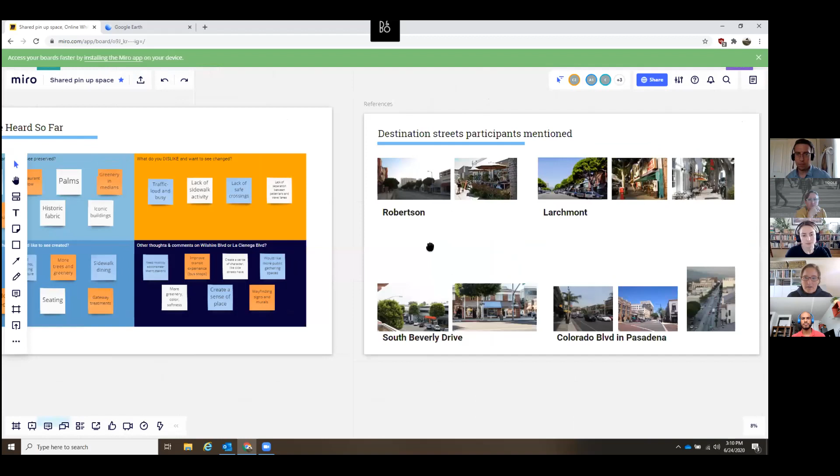So it has its own sense of identity within the community, and it's a place that people are encouraged to go. A lot of people mentioned different streets. We asked a question around destination streets: where do you go, what do you like? And lots of people teased out a number of different locations.

We couldn't pull it all together right now, but some streets that seem to resonate with folks are those of a certain scale and experience. There are strategies we have for how we can infuse a little bit of that into Wilshire and La Cienega.

Elements of a great street. So just wanted to mention some things that we're considering based on some of the conversations. The importance of nodes and destinations along the corridor, breaking it down into areas where people can congregate, or there's a greater presence of retail and commercial areas. That's a real critical component of this.

We'll talk about how that breaks down in character zones in the next slide. Some of the elements you've talked about are how we can get these destinations and nodes to contribute to the experience and provide opportunities for rest or congregation. Street character—can we infuse a sense of identity through the materials we choose, as well as the plantings and different elements?

Buildings and sidewalks, making these human scale, so they feel very comfortable to people walking along the corridor. There are lots of strategies we can employ around creating new active and open facades as redevelopment happens, and ways to encourage cafe spill-out space or retail spill-out space in a new configuration.

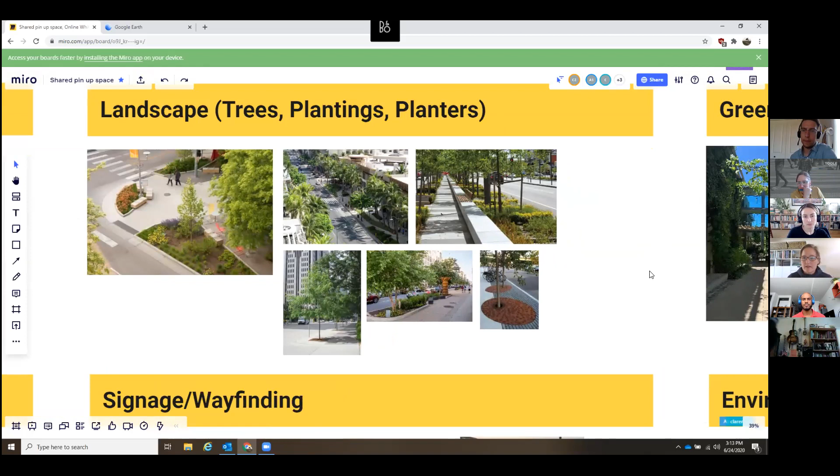Crossings—again, we talked a lot to folks about the importance of pedestrian comfort and safety. How do we provide great opportunities to do that at key intersections? That can be handled through things like a pedestrian scramble. In some instances, there might be opportunities along the corridors to provide mid-block pedestrian crossings and refuges, but how we treat those will be really important so people are safe, feel safer, and are safer.

Signage and wayfinding can be a great identity feature as well, part of a cohesive strategy to really tell the identity of Beverly Hills.

Some other elements we talked about with folks are transit and the importance of creating shelters that feel welcoming and feel perhaps part of the identity as well of Beverly Hills, contributing elements within the corridor.

Lighting can also be a feature here. There are a lot of different types of lighting along the corridor, and what are some of the ways we can pull that all together and have an overarching strategy for lighting that feels pedestrian scale and contributes to safety along the corridor as well.

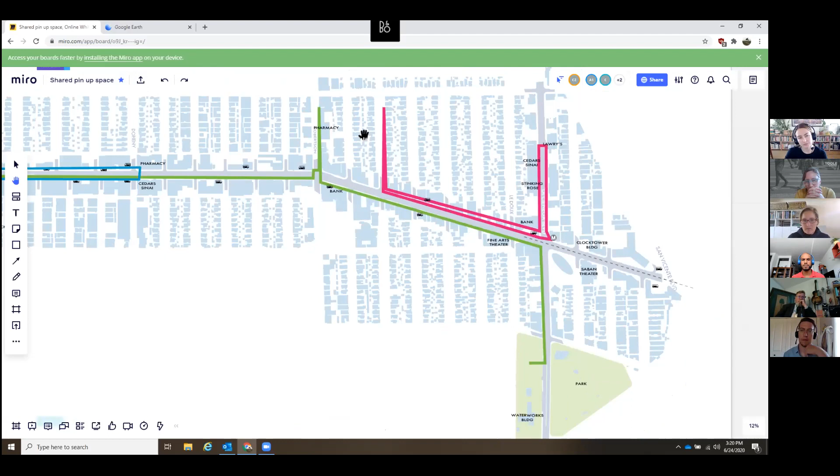Maybe it's at Cedars-Sinai, and they're having some lunch or dinner at another restaurant or destination, and then they return back to their home as well.

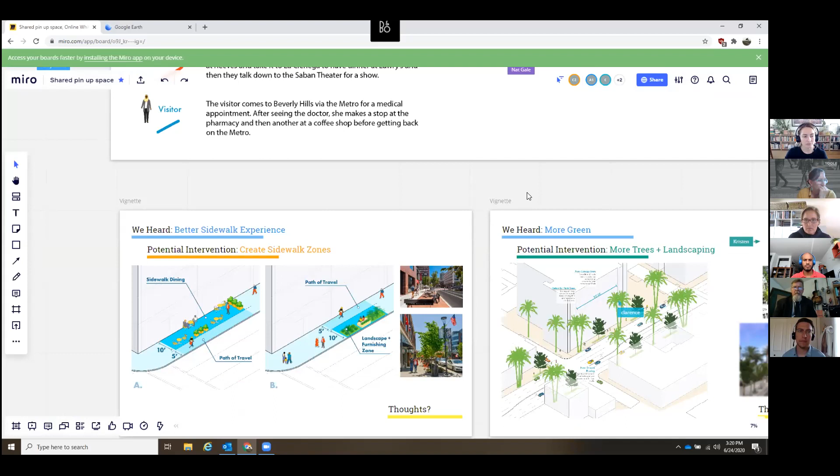And then we wanted to dive into some starter ideas around how we can improve the sidewalk experience. These are a series of vignettes that I'll have Clarence and Abby speak to, creating a more enjoyable sidewalk with the space that we have existing, and maybe some ways to augment that for the future. So Clarence and Abby, go ahead and take it away.

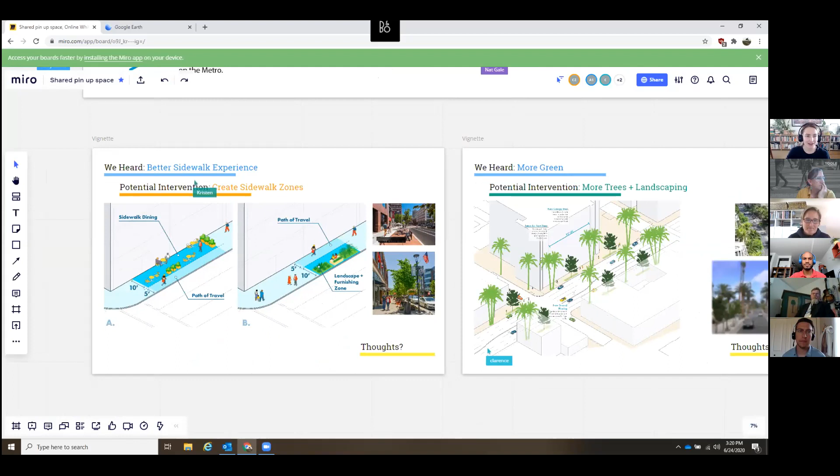Great, I'll jump in since we're going in order here. I'm Abby, I'm with Rios, who's also on the design team. So just to build off some of what Cindy, Nat, and Kristen have already said, we've heard a lot of great feedback about trying to find ways to make the sidewalk a more enjoyable experience along Wilshire and La Cienega, really focusing on the pedestrian experience and thinking about how we could make that more enjoyable, more comfortable, safer, more beautiful, just better in general.

Later we'll touch on ways we might expand the sidewalk zone in certain moments, but here we wanted to think about strategies to work with the existing sidewalk. The majority of the sidewalks in the project area are 15 feet wide, so that's not enormous, but it's certainly enough space to carve out some different zones.

Here you see two different diagrams of strategies we could use to carve out different areas within the sidewalk to help make it feel like more of a place, enliven it, make it safer, and more enjoyable overall. On the left, we thought about dividing the sidewalk into two general zones: a 10-foot area close to the building, and a 5-foot zone closer to the street.

In certain areas along the corridors, it might make sense to have sidewalk dining or let the retail spill out onto the sidewalk, which is what you're seeing on the left here. This can be great not only for folks coming to eat at the restaurant who want to sit at the patio, especially during post-COVID or current COVID times, but also makes the sidewalk more enjoyable and feel like more of a place, even if you're just walking by.

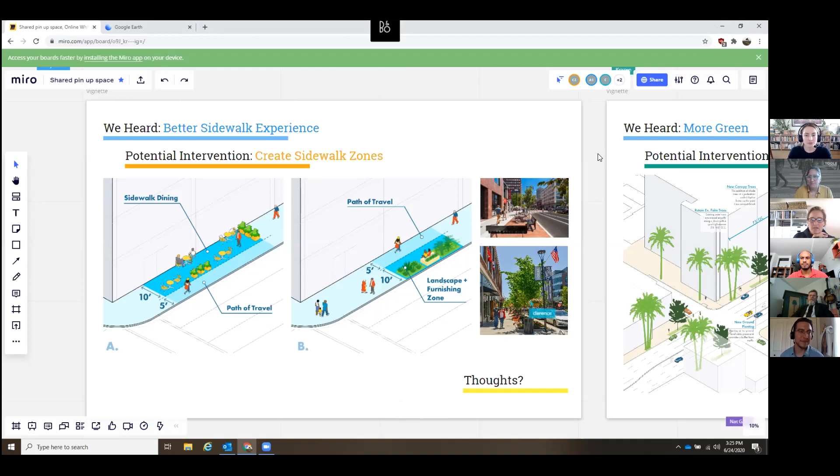Thanks, Nat. I think we'll have another discussion around this and these ideas as we look at some cross sections that we've started to frame conversation again with you. I'll pass it off to Clarence now to talk a little bit more about some green landscaping opportunities and then also some street furnishing opportunities.

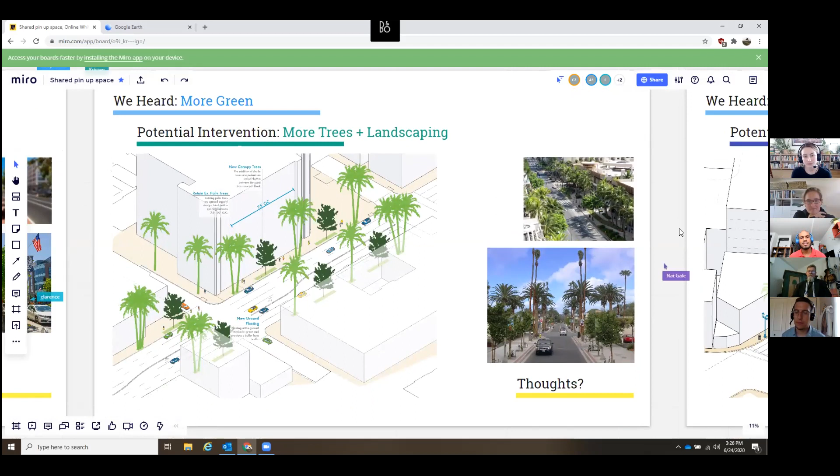I'm Clarence, also with Rios, part of the design team. One of the comments we heard is the want and desire for more green on the street, whether through ground planting or the addition of canopy trees. Right now the existing palm trees are at a rhythm of between 70 and 100 feet on a lot of these blocks. We understand these palm trees are very iconic, but they do not provide a pedestrian scale, both in rhythm or height. They also do not provide a lot of pedestrian shade.

So one thought is a strategy where we begin to punctuate in between those palm trees with a canopy tree, something a little bit more scaled to the pedestrian, and providing some ground planting within those canopy tree zones that could provide not just a green kind of wash across the street, but also has the function of becoming a barrier and a buffer so that people will feel safer, whether through some sort of pedestrian amenity zone, through dining, or as you are walking down the street.

And then if we wanted to go to furnishing next, we wanted to have a conversation about what are the different amenities that happen on this pedestrian scaled streetscape, and how we can begin to concentrate furnishing at certain nodes, certain areas where we feel there will be more pedestrian activity, but also have a consistency of both furnishings and rhythm of street lighting along the entire corridor. We wanted to open up the discussion about not just what the furnishings are, but also what these bus shelters begin to be, and how all of these furnishings add to the identity of the corridor.

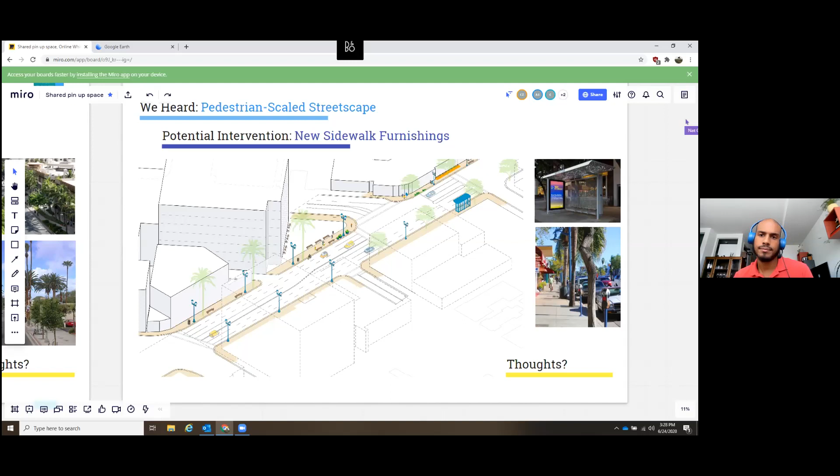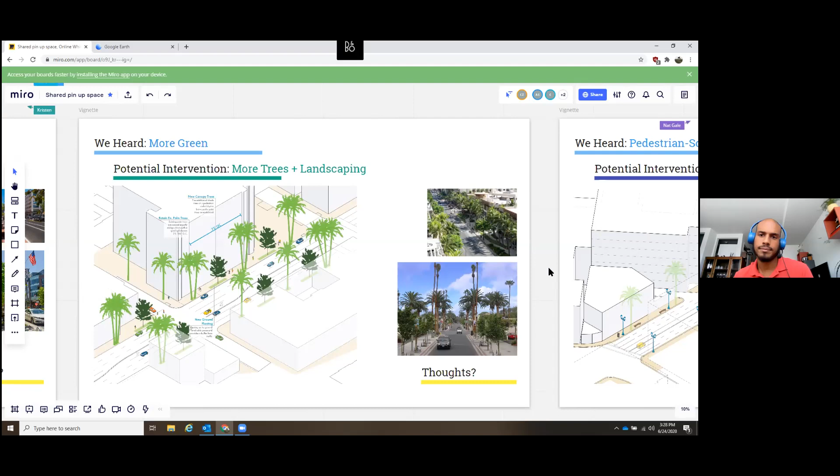Thanks, Clarence. I'll also mention that some of these strategies are what we'd call long-term ideas. We talked with Ken, our urban forester, about as we think about augmenting the corridor, what does that mean in terms of maintenance and things like that? So it's something we need to consider, and there are some lighter touch interventions we can have, say in this green landscaping approach that maybe are above ground, or when the street can be reconstructed, really being intentional about incorporating irrigation and opportunities to take care and maintain the plants if that's something that moves forward.

So I think I saw another chat come through. Should we pause for that?

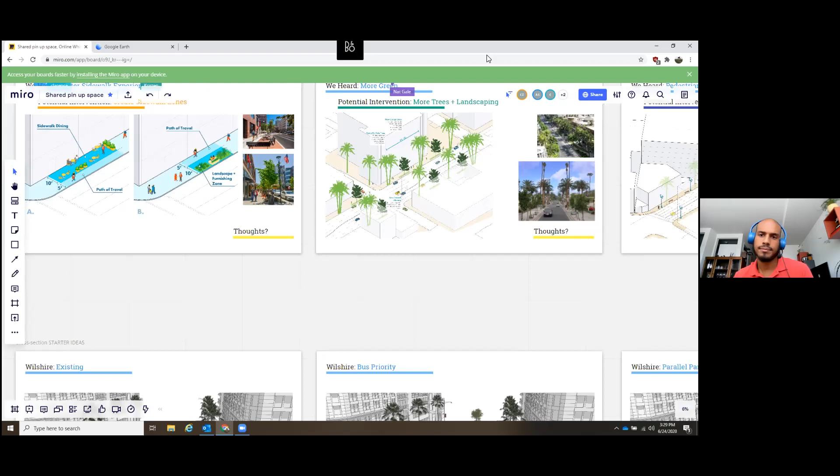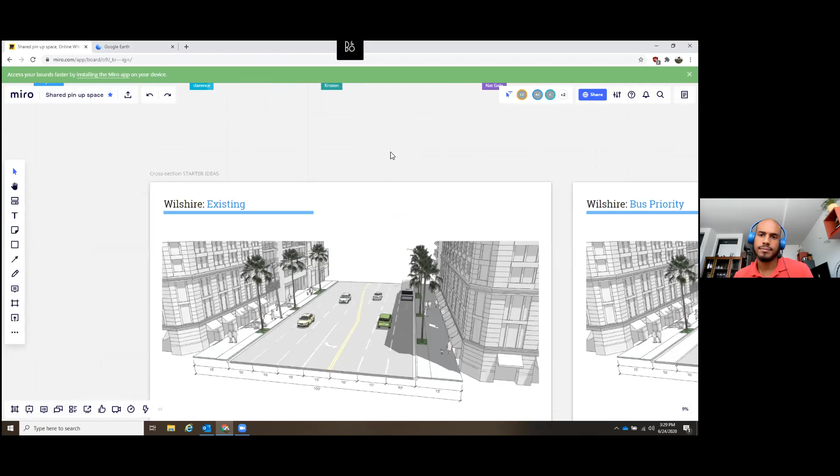It's from Mandana: the 5-foot pedestrian path next to the street may have issues with tree placements and will not feel so safe. I think that's definitely true, if there's 6 lanes of vehicle traffic, 7 lanes including the center turn lane, on Wilshire specifically. So I think it's a great note that balancing all of these strategies with the context of the corridor is going to be super critical, and engaging in some difficult conversations around trade-offs of roadway space. I think that's what Cindy is going to preview next with some of these cross sections, so keep those comments coming.

I think this is exactly what we want to hear from folks. We're also eager to engage in a dialogue and a discussion. So if you want to verbalize something, please, if for whatever reason you're not able to unmute yourself, let us know, and we should be able to take care of that for you, so that we can talk and have a dialogue. I think that's part of the richness of this conversation, is we want to really hear from folks in the room.

Great, thanks, Nat. I think this will be the point where we'll get a real rich conversation, because this is teeing up some different ideas on what we know about the corridor, what are some strategies or ways we can repurpose some of the lanes, and if that's tenable. So it's going to be a good conversation here.

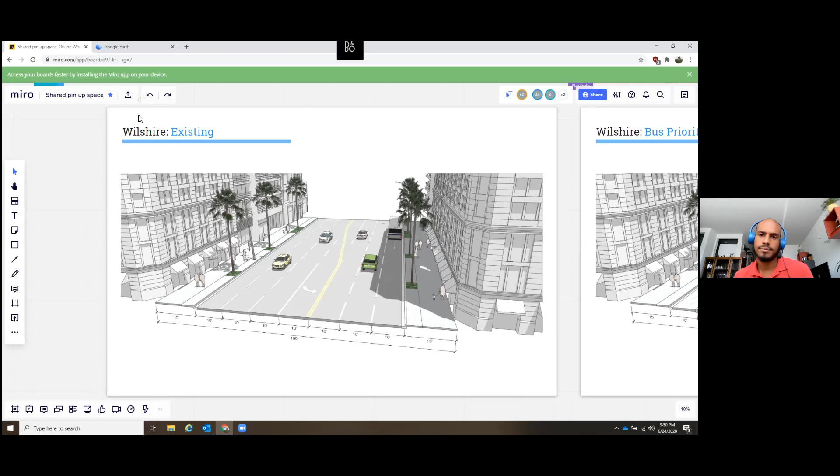It's always great to tee it up with what's existing right now, so you all know how it operates for the most part. Three lanes in each direction with protected left turn lanes at a number of intersections, and 15-foot sidewalks pretty much throughout the corridor, with a few exceptions. When I say corridor, I mean both La Cienega and Wilshire, but we're focusing mostly on Wilshire right now. Yeah, this is the cross section for Wilshire specifically.

One idea, we heard a lot about the transit that runs through, not only serving the community, but running through it as well, and the option of continuing some of those bus priority lanes through here. That would be repurposing the outer lane to bus-only travel. If you have bus priority on that edge, it allows for better headways or better timing of that system. The delay for transit is improved when they're not operating or kind of leapfrogging through personal vehicles as well.

This is also a nice strategy. It does help the edge of the streets feel a little bit more comfortable. Buses often obey the posted speed limits for the most part, and it's more comfortable in terms of the speed along adjacent to a sidewalk. Also there's the importance of how we treat that edge. As Abby was talking about, in some areas the walkway is along the building edge, and how we treat that five feet right adjacent to the busway is really critical as well, thinking through strategies around landscaping and furnishings to make it feel safe and comfortable.

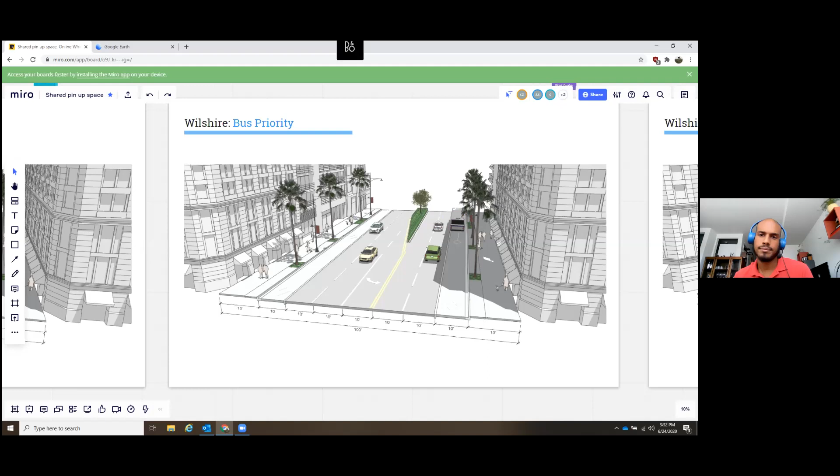I'll just note on this one, again for some of the comments that were already made about not enjoying alfresco dining next to six lanes of car traffic or the five-foot pedestrian path, this is one strategy to think about how that curb lane can be just a different type of buffer.

I'll also note that we've heard, through our stakeholder interviews, that there's a history of an attempt to put a bus lane down Wilshire previously in Beverly Hills, and that's come up in these meetings before, so we're not glossing over that. This is just part of our responsibility as designers to consider all sorts of options and all different ways of thinking about how to future-proof the street, how to think about what the street will look like, not just in the current condition, but 2, 5, 10 years down the line. We wanted to make sure folks know we're aware of the history and also thinking about the future. The last thing I'll say is, in the design team, we haven't talked about this, but there are more targeted bus improvements you can make as opposed to just a bus lane—queue jump lanes, things that allow you to speed up bus activity just in targeted improvements around intersections. So that's something to think about in our design approach as well.

Thanks, Nat. I think one thing I want to call out here, a pretty critical element we didn't focus on too much for this initial pinup, is this idea of a median. This is something that would be a great strategy, especially along Wilshire, as we think about—if we can't really affect the sidewalk space on the outside edges—what are some other ways we can make the street have its own sense of identity and iconic feeling?

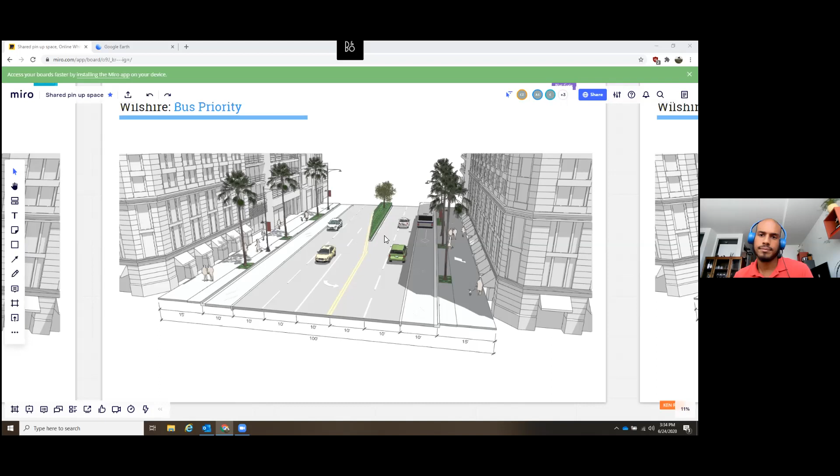In some areas we have dedicated left turn lanes, but they're sometimes very long turning pockets, and we could shorten those—meaning the length of this lane right here is very long. But there are opportunities where we can shorten that up, still provide for the dedicated left turn lane, but create a median experience. I have some images we can look at if you're interested, from some comparable cities that have done a really good job with medians. You already have some, of course, in some areas along Wilshire, certainly in the Golden Triangle area, but we could supplement that with some others as well.

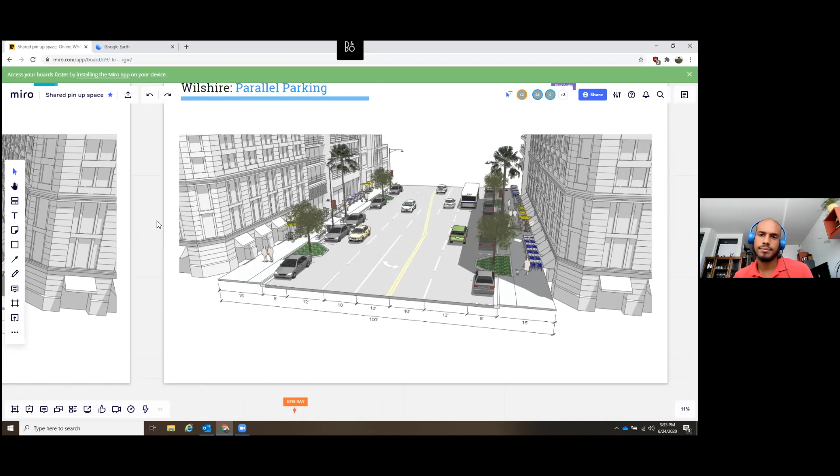Another option for that outside turn lane, and to incorporate a little bit more pedestrian-friendly environment, is to repurpose that outside lane as parking, dedicated parking with bump outs. This would allow for landscaping throughout the corridor and that buffer, that real feeling of separation between the fast or heavy motor vehicle traffic and the two interior travel lanes, and of course the dedicated left turn lane. So just another option we're exploring.

I might pause here and see if there's any comments on these two options and how people feel. I'd love to hear from folks. Feel free to unmute yourself again, or chat us if that's easiest.

Hey guys, this is Corey Clem. I just wanted to agree with Ann. I don't think we could do a greater disservice to this corridor than to not provide contiguous infrastructure from what borders us to the east and west. I know there's a history there, but hopefully we can pitch to the community and help them understand that even though there's a rail line going underneath us, the buses serve a lot of other people. And as we start to get some increased density, that's going to be very important for people to come in for work across all jobs. I think the pushback I've heard is that people think the subway is going to solve that problem. I just want to make sure that as you guys pitch this to the public, you help make that distinction.

Great point. That local service is really critical. Metro serves a certain role, as does transit within this area.

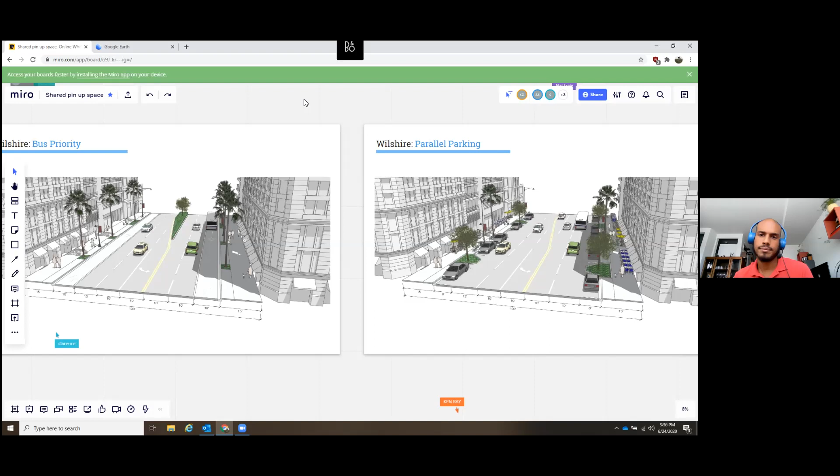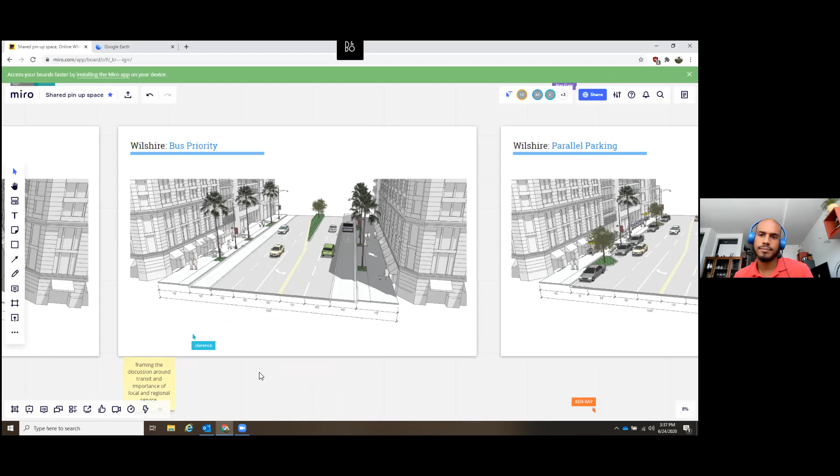Yeah, I was just going to say we could even think about reframing the name bus priority, right? Because we've seen other cities take these sort of flexible lanes and turn them into different mode lanes - taxi lanes, TNC lanes, other private shuttles. We've heard from some of the other institutions in the area their interest in providing more mass transit. So it's just about thinking about the flexibility of the street and the dynamics of the street, and how we can create a street that's a little bit more catering to all those different needs.

So thanks Anne, who typed it into chat, and Corey for speaking up. It's helpful to hear that.

I don't know if it's a third rail, but I had mentioned in my chat with you guys, if you look at the data from bike share to our accident data to just Strava, this is going to get used by cyclists who are taking other forms, including the subways. I don't know if you've got a transit priority slide where that becomes a hybrid, and maybe you left that off intentionally, but I just think that outside lane as transit is a really good way to pitch it.

Yeah, that's a great comment. We do have some imagery around, yeah, here we go, that repurposing or that dual purpose option.

Yeah, I saw that, that's great. And obviously that flanks us to the east and west. So people that are commuting, who are not on the charrette right now, when they get to the city borders aren't going to understand that that's gone.

Mm-hmm, yeah, good point. Any other comments? I'd love to hear from others on these two different options and ideas along Wilshire.

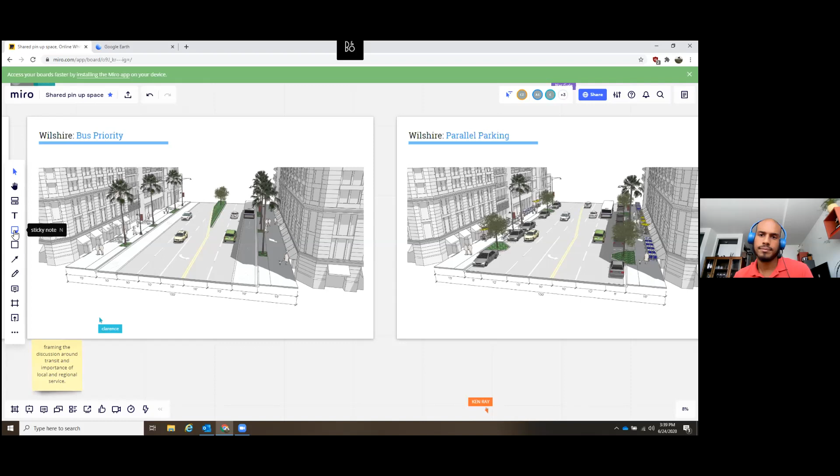Oh, hi there. I don't want to dominate the discussion. No, but I'd love it, it's helpful to just hear some of the context you're thinking about. You mentioned you're interested in a bus lane, but you're also not interested in alfresco dining next to busy traffic. So just would be curious to elaborate on that a little bit more.

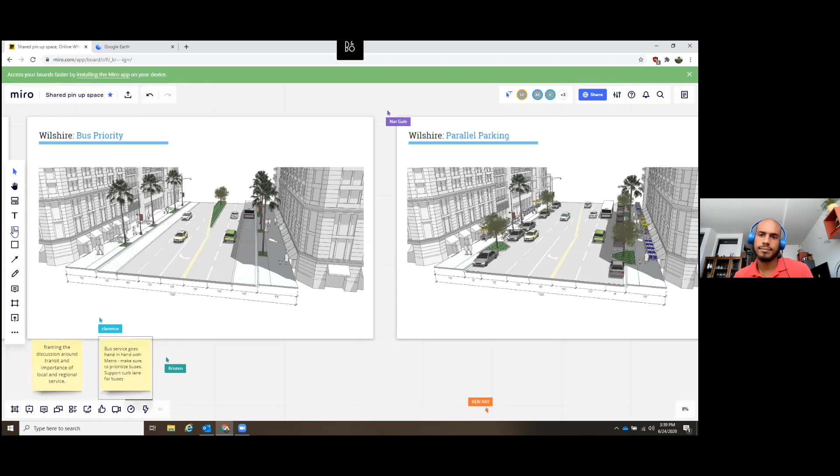I think the number one solution, and Beverly Hills does it so well, is trees. And I think there really should be that median in the middle. You've got it on La Cienega, south of Wilshire, between Gregory and Olympic. The cars are so fast there, but I do think it probably helps calm the traffic.

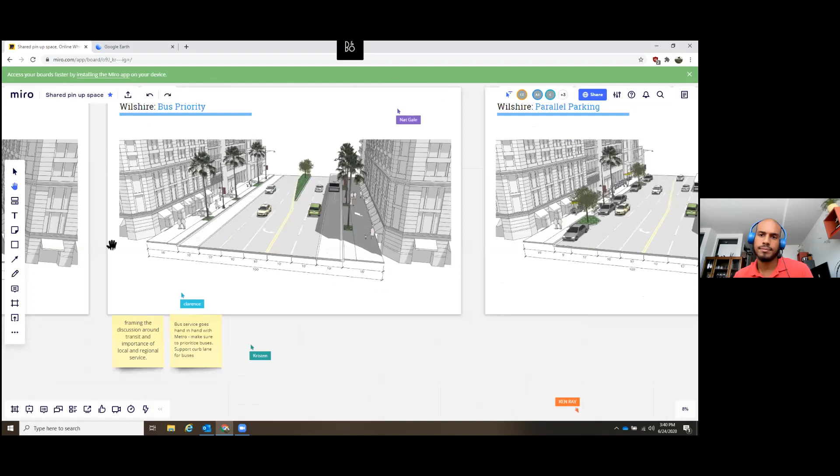And if we can get trees with decent canopies, it'll help clear our air. I think it's the best tool to make walking hospitable and car life bearable. So you can't do enough in terms of tree canopy and planting.

And it's a good deal too, I guess, right? But I think, well, since I'm talking, I think...

It's also that Wilshire is a contiguous street heading east. Like the other man from the Historical Society mentioned the other day, connecting the La Cienega stop as far as the Academy Museum at Fairfax.

We're two cities, but could we... I live in Carthay Circle, just on the edge of Beverly Hills, and there's that San Vicente Wilshire intersection, which is enormous with those angles. I don't know where Beverly Hills ends, but I'm hoping both cities can somehow work together on that so everybody can get across that intersection and make it more functional along the street.

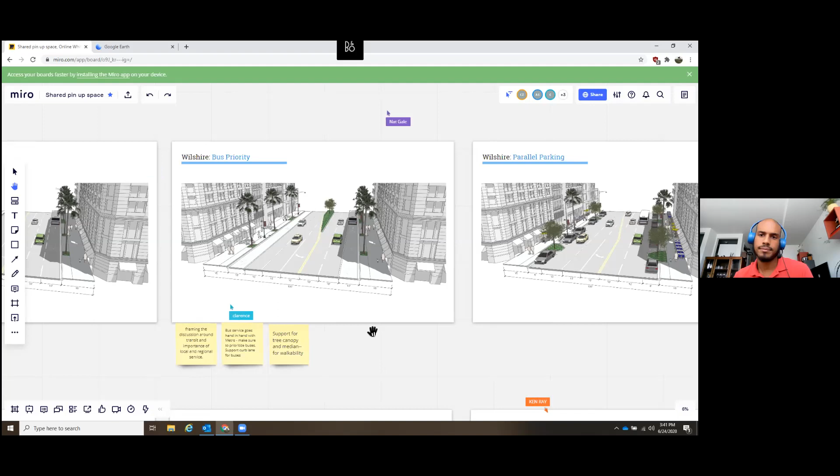The median helps the street feel like two streets in one, so it's not this huge, wide, harsh environment, especially if we're going to find areas for outdoor dining or seating.

Any other comments on Wilshire and the two different options we've shown here? If not, I'm going to head down to our thoughts on La Cienega.

Can I just ask one quick question? I'm sorry, it has nothing to do with that lane, but these are beautiful designs. Everybody always is concerned about traffic, no matter what modality you're in. Do you guys ever back these up with data, the data you currently have and the anticipated density and traffic coming from this, to show during peak times what that looks like, even if it's a beautiful little visualization and a model? Do you ever use that?

That's a great question, Corey. I'd say that's one thing our firm is really focused on, making sure this still functions and being able to tell the story. When I say functions, it's functioning for all modes, but also being able to back up the strategies, the changes to lane configurations with data. We've requested that from the city and we're going to be looking at that closer. For what we know in terms of the ADT, average daily traffic, we can certainly accommodate what's happening with the lanes we're proposing here. But doing more review of that is our due diligence that will happen in the next couple of days following the Charrette.

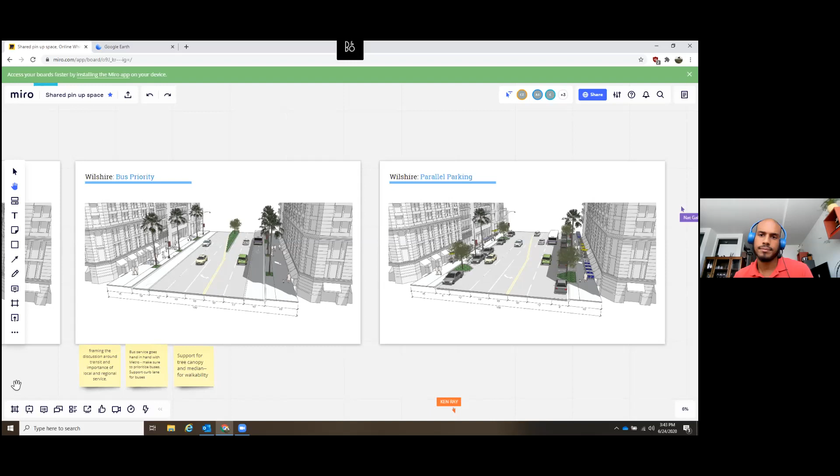One other thing we also do is make sure we can ground truth it with similar examples of other streets with the same capacity, the same ADT, the same number of trips, and the different configurations we're looking at. You actually don't have to go that far - a couple more miles to the west, Wilshire Boulevard in Santa Monica has two lanes in each direction, a transit-only lane during peak periods, and the rest is parking, with about 45,000 to 50,000 average daily trips as well. But we'd want to be looking at the data for this street, in particular the traffic counts in Beverly Hills, and make sure we're making informed design decisions based on that.

Yeah, great. Thanks, Corey. Appreciate it.

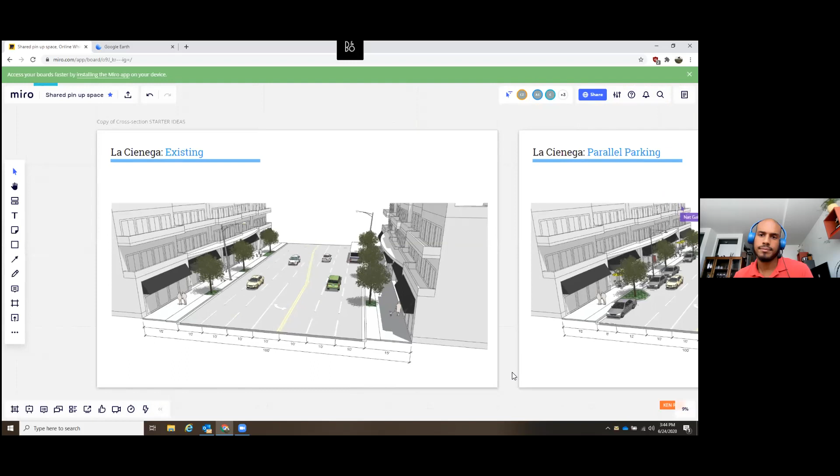The existing conditions along La Cienega are not dissimilar to what you see on Wilshire. A little bit different in terms of buildings and their architectural form. But again, a cross section that you're probably well familiar with in terms of 3 travel lanes in each direction, left turning movement protected, and then 15-foot sidewalks.

Similar sort of approach here. One of the things we've heard a lot about is this historical role that this street or land use has played in terms of restaurant row, and is that something we want to continue to encourage or bring back, and how can we do that through some different streetscape strategies.

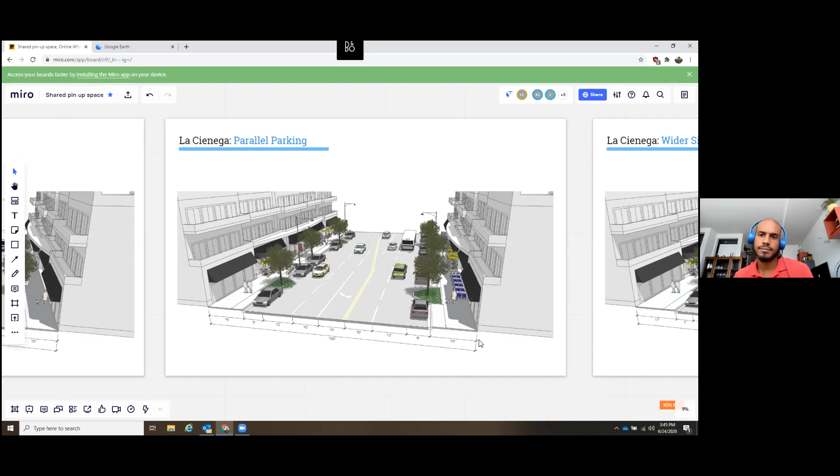So again, how we're thinking about that buffer space. In this instance, we're showing a protected sidewalk with parking, and then some bump outs in certain areas. If it makes sense based on land use and encouragement, if there's adjacent parking, this whole space, including that 8 feet, can also become part of the sidewalk, which is a very generous space for potentially outdoor seating and cafe spill-out space, retail spill-out space as well. So that's the parallel parking option along there.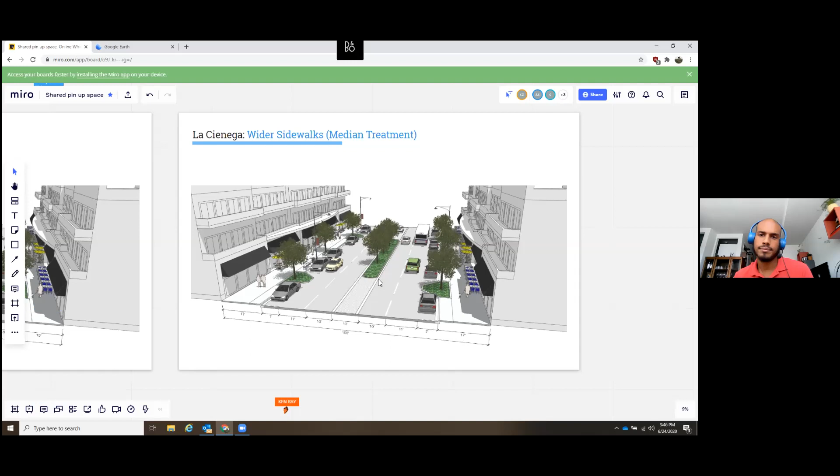Again, a median could be incorporated into any of these that you're seeing. This one is another wider sidewalk option, where we could have a median treatment in the middle, still allow for two lanes of travel, and then a narrower parking bay along with a generous sidewalk, increased sidewalk and some planting areas there too.

So I will pause here and keep these 2 slides up for any comments or questions people have. Anything anyone wants to add from the design team as well? I would open it up to you and to other folks.

Yeah, I would just offer, oh, go ahead. Oh, no, go ahead, Nat, sorry.

I was just going to offer one of the things on La Cienega that we're also looking at is, in addition to the cross section, looking at the rhythm of crossing opportunities throughout the stretch that's in the city of Beverly Hills, because there aren't many at all, and so those are really long blocks, and whether it's the treatment on the right wider with a median, or the treatment on the left, just finding opportunities to knit together the 2 sides, so that it feels like one cohesive place, and not that there's this huge barrier to get from one side to the other currently if you're on foot, if you're just trying to get out for dinner or whatnot.

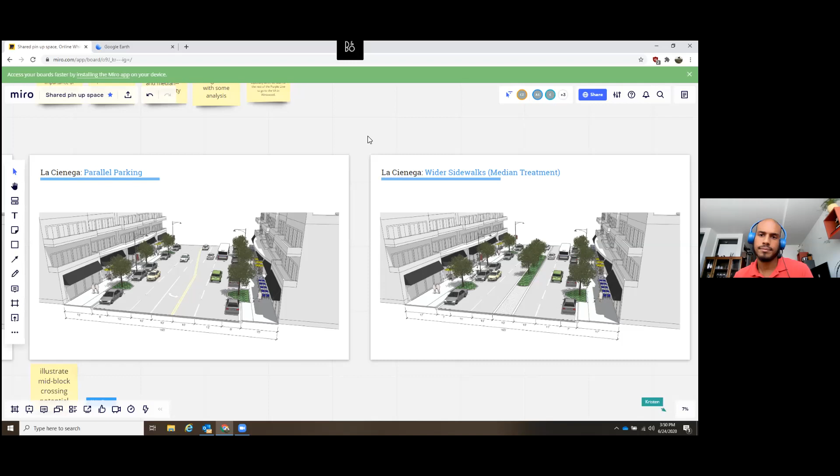Yeah, sure. So as part of this project, we're also looking at the Yale staging yard that Metro is using right now, about a block and a half east of the north portal on the northeast corner of Wilshire and La Cienega. We're really tasked with thinking about all the different programming elements for what a mobility hub would look like.

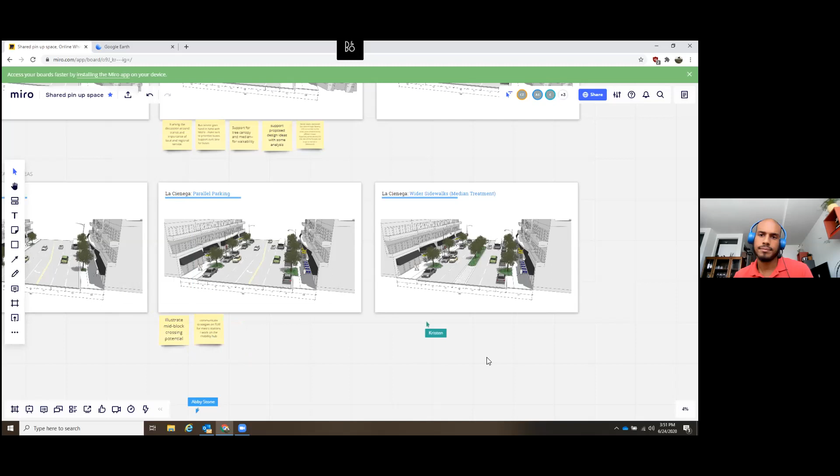Just yesterday we had a conversation internally about the many different ways to think about the design and programming of a mobility hub, and what amenities it should have. There's a balance between the operational transportation needs, like bike storage and TNC pick up and drop off, and the sort of place-based elements, the land use or amenity programming, food halls, restrooms, the ability to get a coffee.

So we're tasked with thinking through the different ways to go about programming that from a transportation standpoint. Some of these same conversations are really important to thinking about pick up and drop off on the curb area or on the side streets, and how we design a transportation environment that adequately accommodates all the different ways people are going to access the station.

One of the big concerns is not having people driving and blocking Wilshire and La Cienega at that corner portal area. That's why this mobility hub is important from a transportation perspective, thinking about how we tie people from that Yale staging yard to the portal itself.

We also have to think about land use and amenity programming, and how to really make it a place. So we're operating at the intersection of transportation and land use, much like the Streetscape plan.

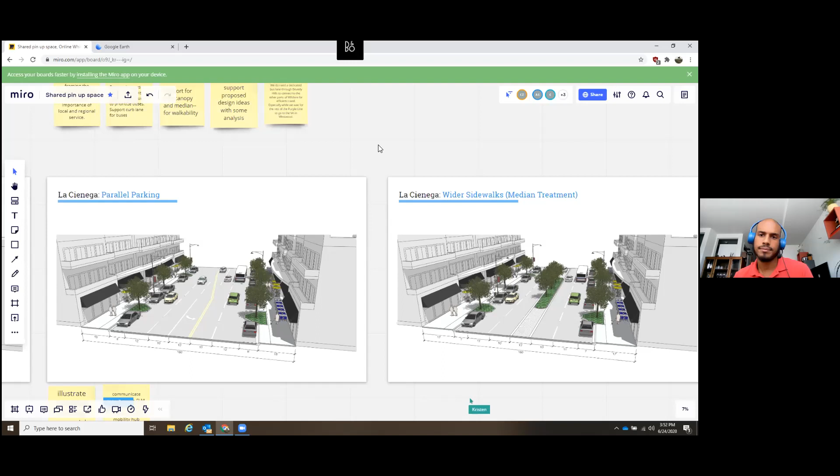That's part of our work over the summer months, and ongoing community engagement is going to be continuing to throw ideas against the wall for what makes sense, what are the community priorities for that mobility hub. So if anybody here has thoughts, Corey, would love to hear what you're thinking, and anybody else, would love to start that dialogue about mobility options for accessing the Wilshire and La Cienega station in particular.

Well, I guess this didn't come out in our conversations yet - this is Corey again, sorry. I always assumed that the eastern edge of the city might be a little more forgiving to access, especially with employers like the Beverly Center, 11,000 people at Cedars. But there's no contiguous infrastructure there, even with wayfinding.

So I'm curious, I've got a map right now of a 1 mile radius of that stop. How do the employees of Cedars get up there? If you're not treating that here or through the mobility hub, you're kicking them off to the west side of the street, a bi-directional bikeway that takes you up to that crazy intersection at Burton Way and La Cienega, which is not without its challenges.

Yeah, great ideas, great things for us to be thinking about in the design process. I know we had a conversation with Cedars, and they're certainly starting to think about how they're shuttling employees to and from the subway station. Our first last mile study will be really important to think about all the different ways people are going to access that station.

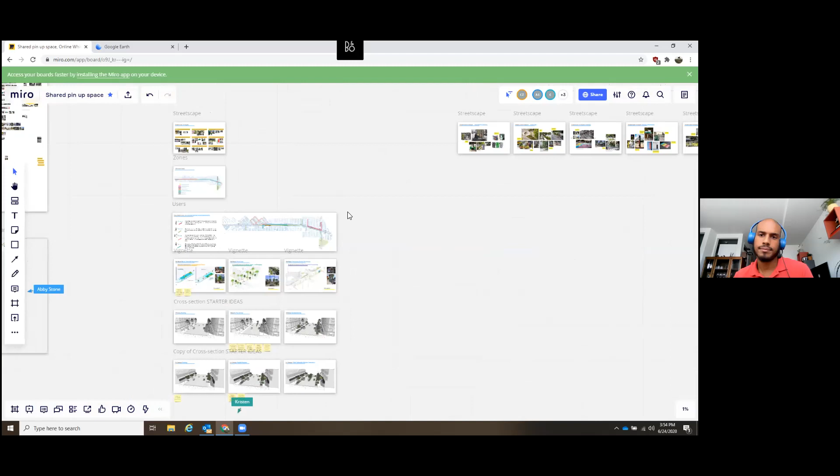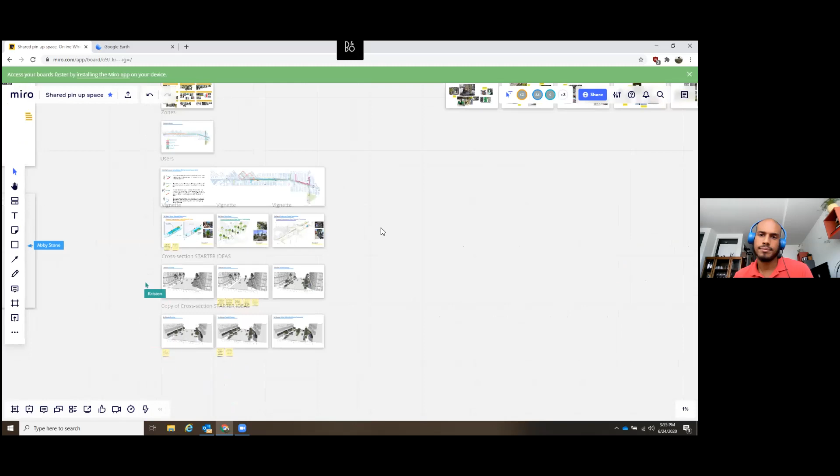Yeah. I mean, I come from software, we do user stories for all of our stuff. It might be nice to see some user stories for the La Cienega hub, since you just have them for the triangle right now, I think.

Thanks, that's a great comment.

The reason I dwell on that so much is—I don't know how much you guys get into the planning process, but from everything I've heard from Dr. Gold, there's a lot of energy around developing that area with more density. So to not treat that like every other subway stop in the world scares me, because anybody east of us is going to run into that wall and have to go into the triangle to get out, assuming we have the infrastructure there. So I take that into consideration—that could tend to be the densest part of our city by the time this is done.

Good point. I think that tracks with what we were showing in the character zones. Really thinking about the design priority for Wilshire and La Cienega as the pedestrian being the design vehicle—I'll come back to that again and again. What you see in hot pink there has to feel like a different type of place when the subway is open.

We know, we've heard it many times, Wilshire is a regional corridor, people traveling through. That doesn't mean—especially if we want it to feel uniquely Beverly Hills—when people come up from that subway station, the way we treat the public realm, decorative crosswalks, curb extensions, public plazas, these are all really important things to think about, to ensure that when you're in that zone, it's clear: you're here in Beverly Hills.

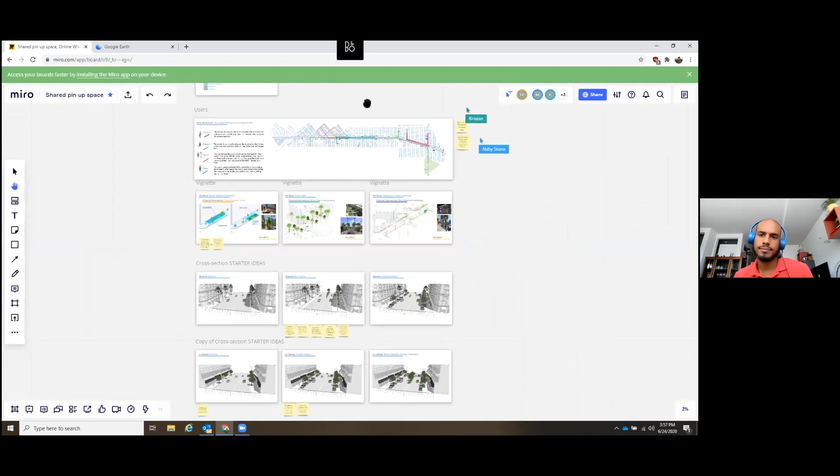So who else? Really, this is your time, we're here for you all. We want to answer questions and engage in dialogue. So I'd invite anybody else on the call to unmute themselves, speak up, ask us questions, and I'm happy to call on some folks—Elisa, Anne, if you want to speak again. Nicole, would love to hear from you, if you have specific things you want to get into.

We've got another day of design in this charrette process, so we're going to take everything we learned today and compile it into a final report out at the end of the day tomorrow. So all of this—you're part of our team in live time. Anything you can share, any questions you can ask, are really going to help make this a more robust process.

I know at the top of this meeting, at 3 o'clock, we said we'd give another intro, share what we're working on from 4 to 5. So I'm curious, anybody on the call, if there's anybody participating right now—if there's anything you missed at the beginning that you want us to go back to, drop it into the chat. I'm happy to repeat what I said at the top about the charrette process and start to go through it again—certainly don't want it to be overly repetitive for folks. So again, if there are specific design concepts, specific things you want us to drill down into, please chime in.

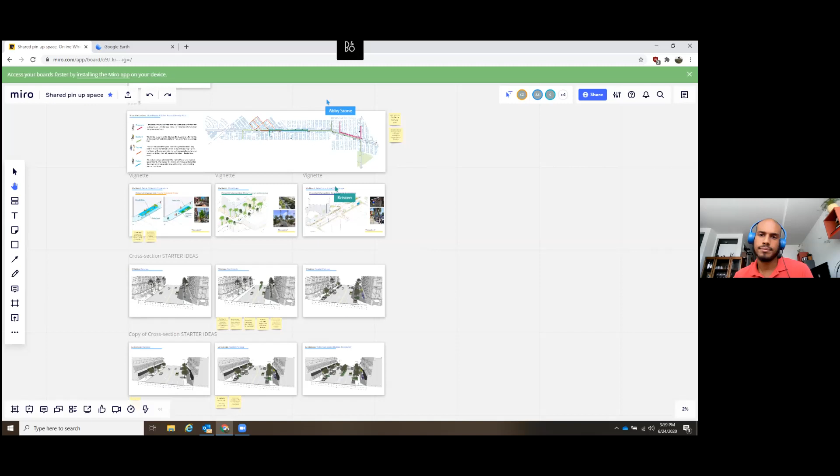I know Darren's got some ideas. I know Ken does too, Ken Pfaltzgraf. I'll just speak for myself—I do have ideas, but I'm really here just to hear what the residents and the businesses of the community think. Of course, I know, I was teasing. Ken, you want to offer anything? Yeah, that's—you heard Darren, that's why he's my boss. Expert tutelage.

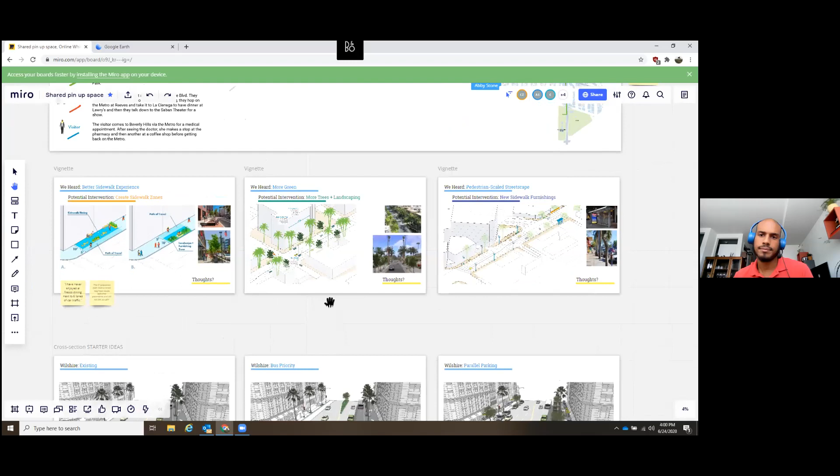Well, Ken, I appreciate seeing your video and all the musical instruments you have behind you—I think we're gonna have to factor that into our next charrette somehow. Yeah, right—oh, you're on mute, you're on mute. Oh, I'm a consultant right now, so I'll be paid for this. Yeah, you see the palm tree? Uh-huh, yeah, so those, I make those. So we're really, really bored now, I can tell.

I think you gave some great feedback to us as a design team around landscape and being practical, and ways to infuse a little bit more of the tree canopy idea. I appreciated the conversation we had yesterday about how to think about that from a short-term perspective, but also long-term—like you said, it may not be something we can do right now, but is there a way to think about how we plumb the area for irrigation and turn-offs that are appropriate, and things like that.

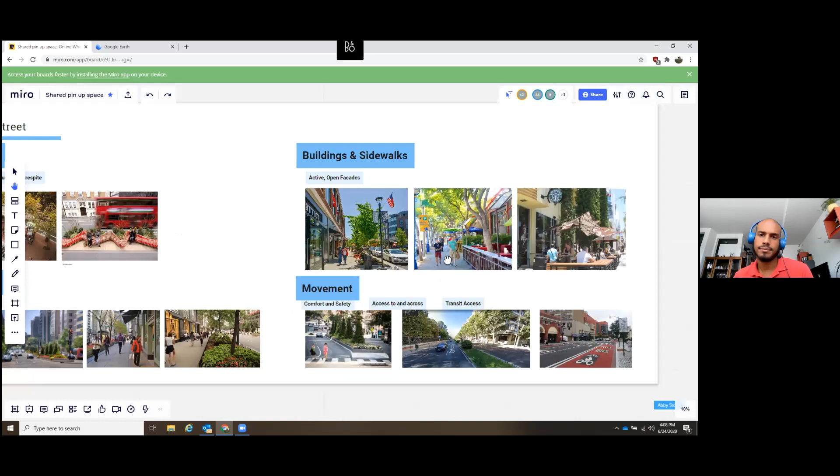How we do that will happen through a couple of different interventions - how we're considering nodes and destinations, and key gateways or intersections of the community within the corridor. Buildings and sidewalks, how they're activated in different ways and how they feel in terms of human scale from their frontages and elements we incorporate. Same with overall street character - how we're addressing that it contributes to the experience of Beverly Hills and its identity.

That can happen through a variety of treatments - everything from the furnishings we use to the landscaping you see to median ideas throughout the corridor. A lot of our conversations throughout the week have been around comfort, safety, and movement throughout the corridor. There are certain areas that feel like destinations, and certain areas where people may want to walk further distances, but it's not comfortable, it's not pleasant.

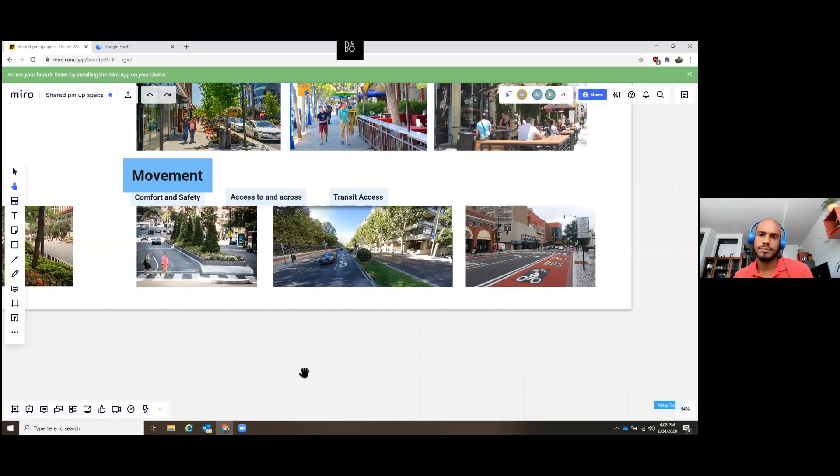Then there's the crossing element - as we cross Wilshire or want to cross La Cienega, what are those opportunities and how do they feel? So that's what we've heard from a lot of different people, and how we're working toward translating that into design ideas.

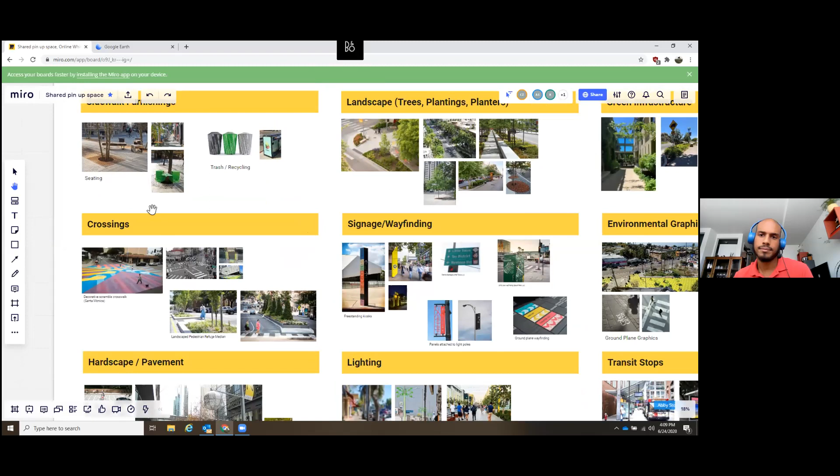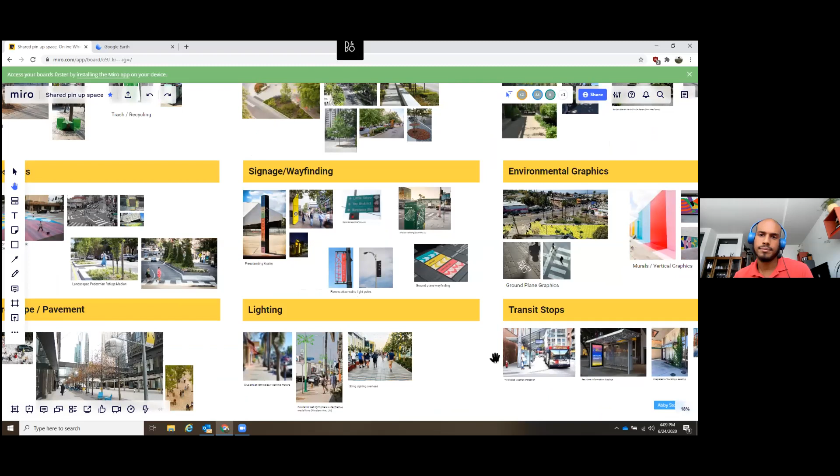I won't dwell too much on this, but there are different elements we want to pull into the corridor when it comes to what we can incorporate into the streetscape. That's everything from furnishings and landscape, which we'll dive deeper into, to how we're treating crossings, how we're creating wayfinding that is, as Nat mentioned, really human-centered - about walking time versus distance. There are elements we can think about there, and how we're incorporating transit or exploring opportunities for that, as it serves a regional and local function in transporting people through the area.

Hardscape is another element we can consider in terms of expressing an identity for the corridors as well - how we think about the different zones of the sidewalk and how those are treated, and we have some examples of ways to break down that space. Pedestrian scale lighting - we heard a lot about safety and comfort, which happens in the evenings too, and how we're creating pedestrian scale lighting that has a good feeling along the corridor for pedestrians as you're walking through. It's really important.

From the west, the zone west of Santa Monica feels different in character because its land uses differ on different sides. Santa Monica and Wilshire provide a gateway, a transition point into Beverly Hills, and with the fountain there, it serves as a gateway into the Golden Triangle character zone. It's a bit different in character.

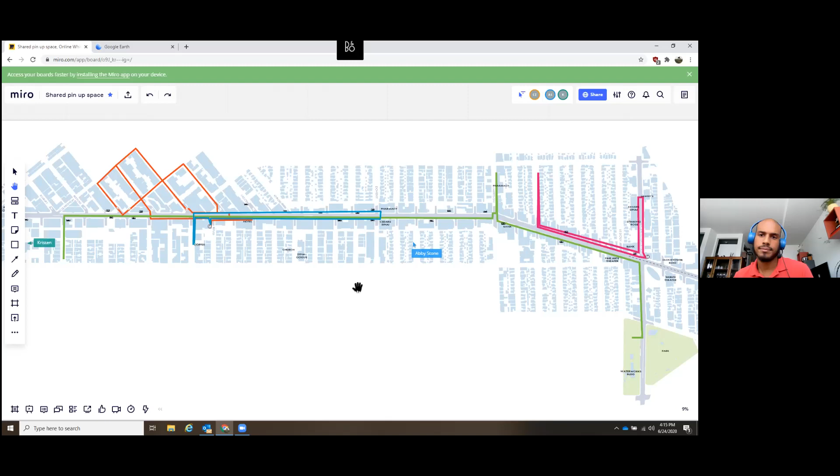So that's a nice long trip, but the corridor end to end is about 2.5 miles, so breaking it up with different modes, it is pretty doable. The tourists are shown in that network of orange lines. They're maybe staying at one of those hotels on Wilshire. They go do a little circuit around Rodeo Drive, could even get on the metro and go from one stop to the next, then up to Restaurant Row for dinner, and walk down to the Saban Theater for a show. So that's all a doable trip too.

And then the visitor comes from the metro, maybe they're going to see the doctor. They could walk down to the pharmacy, or walk across the street from Cedars-Sinai to the pharmacy, and then come back and grab a coffee before getting on the metro again. So everybody is going to move through this neighborhood in different ways, and the elements we bring to the streetscape to make their experience better can be informed by thinking about how these trips are made.

Great, thanks, Kristen. Now we'll dive into some different ideas or strategies for how we can think about, as we look closer at sidewalks, what elements or interventions we can do to make a more cohesive streetscape. So Abby, if you would be so willing to talk about the sidewalk zones.

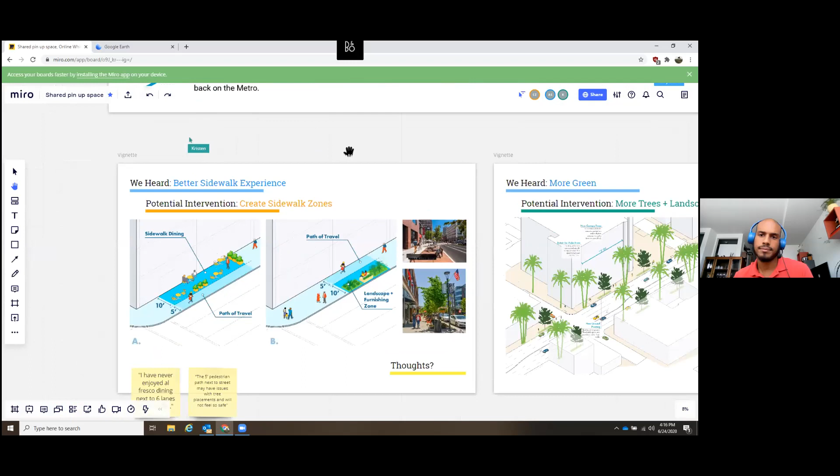Yeah, hi everyone, I'm Abby. I'm with Rios, an interdisciplinary design firm that's part of the team here. So just to build off some of the comments you already heard from Nat, Cindy, and Kristen, we've been hearing a lot about how making the sidewalks a more enjoyable place to be and walk through should be a priority for this project.

Making sidewalks better can mean a lot of different things - more enjoyable, safer, more comfortable, more beautiful, more lively. But we've been trying to think through different strategies to improve the existing sidewalks. Later we'll talk about ways we might actually expand the sidewalk in a few zones, but here we're thinking about what's already in place, typically a 15-foot sidewalk through almost all of our project area. So that's large enough that we can start creating different zones within the sidewalk to help support different uses and make it a more enjoyable place as a pedestrian.

On the left, we were exploring the idea of a 10-foot zone close to the building edge that might be used for sidewalk dining. This would make sense at key spots along the corridors where there are restaurants or other retail that might want to spill out onto the sidewalk, while maintaining a clear path of travel on the outside near the street - noting we'd always want to maintain enough width for a pedestrian or someone in a wheelchair to navigate around tree wells.

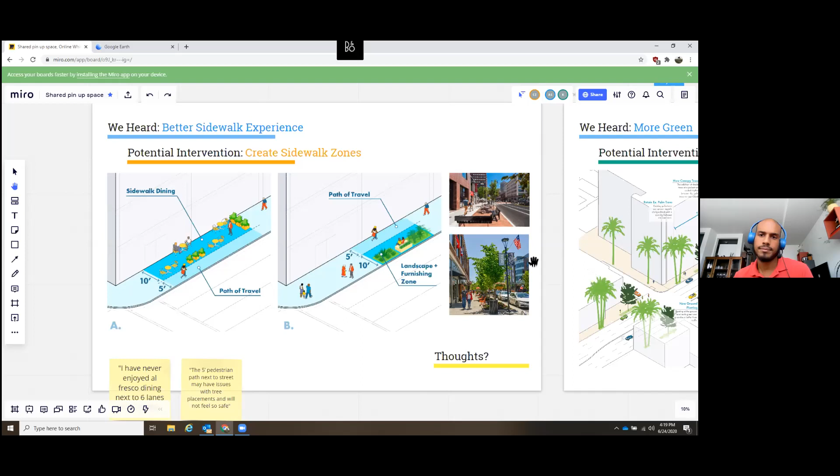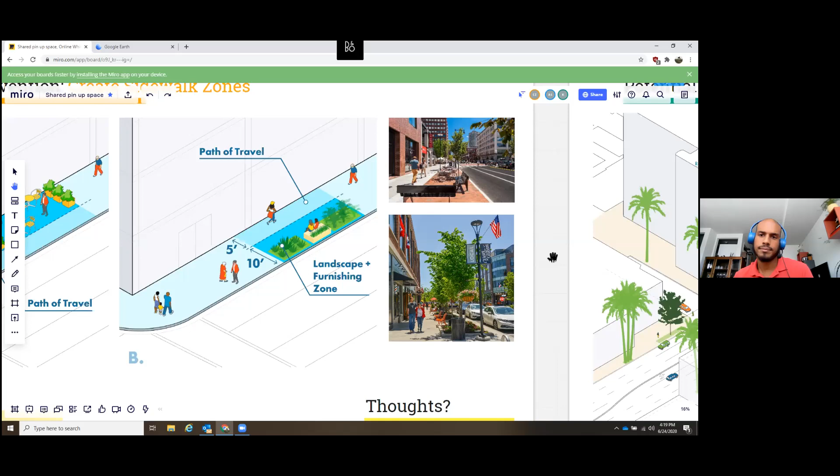On those pictures on the right, you'll see examples of how these zones have been installed in other cities - sometimes using paving to call them out, other times just creating the sense of different zones through plantings and furnishings. This comment applies to almost all these strategies, but we'd want to think of these as very context-specific solutions. They would not make sense everywhere in the corridor, and we'd be strategic about where it makes sense to have a moment with sidewalk dining versus where it makes sense to have planting along the street edge.

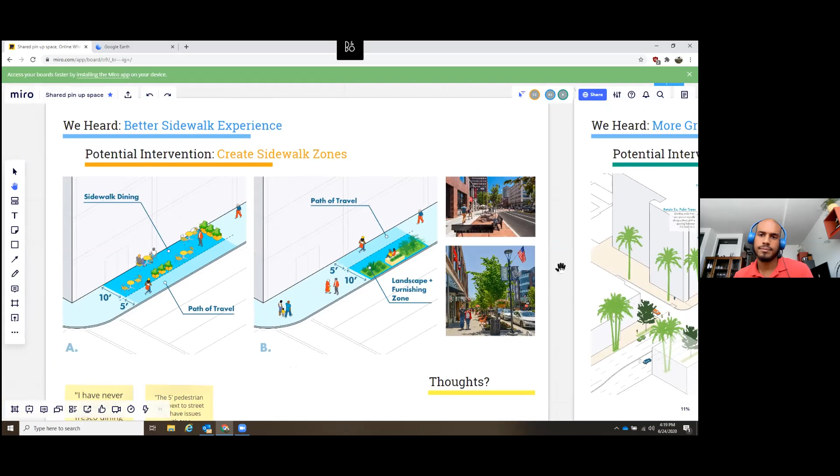Great, thanks Abby. And Clarence, do you want to speak to some of the landscaping and street furnishings?

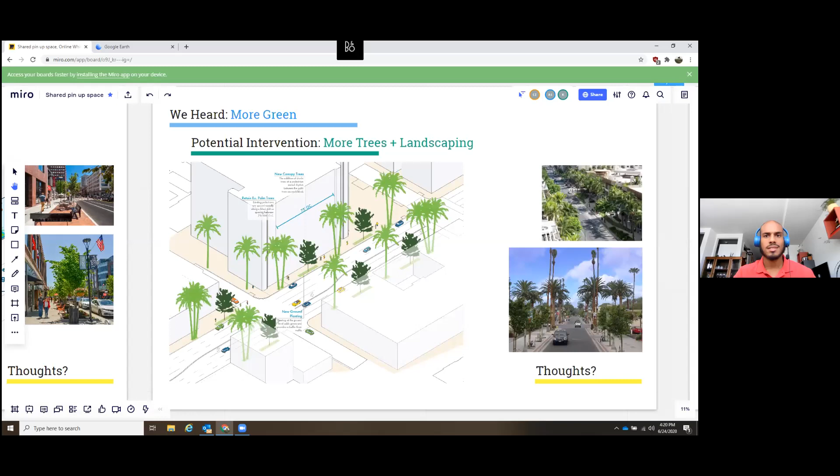Yes, so one other thing we heard is the desire for more green, both through planting and also through trees along the corridor.

As Abby pointed out, some of these strategies are a little bit more appropriate at certain spots along the corridor. So having a ground planting strip underneath some of these canopy trees that begin to punctuate in between the existing palm trees creates a pedestrian scale, but then also creates a little bit of a buffer for pedestrians and then also some of those amenity uses from the street. Right now, the palms are spaced between 75 and 100 feet on center along Wilshire, and using these smaller canopy trees in between not only brings the height scale, but also the rhythm of these trees, scaling down to the pedestrian.

When we talk about some of these ground plantings, it's something that would occur mainly underneath the canopy trees, and would be something that could be above ground or in ground, just based on the types of interventions that we would like to do on the street.

And when we start to talk about some of the sidewalk furnishings, we want to talk about how some of these groupings would define nodes at certain areas along the corridor, how we begin to establish a rhythm along the more through parts of the corridor, but then how things such as bus shelters or cafe seating can also begin to express the character or begin to have some sort of identity for the entire corridor.

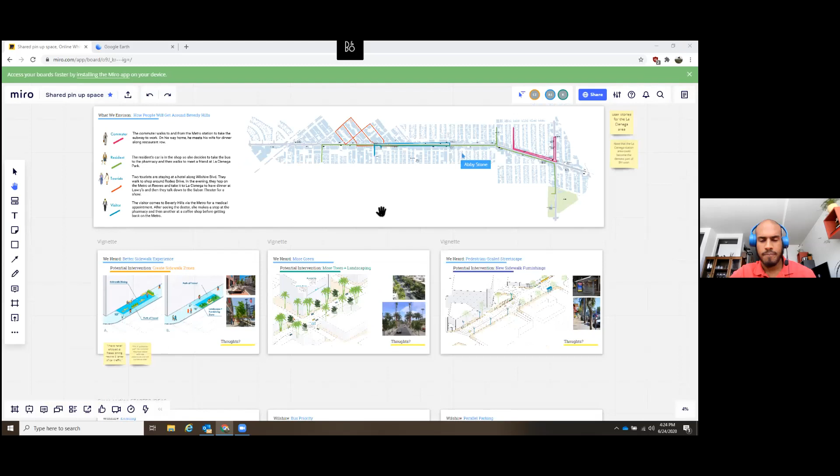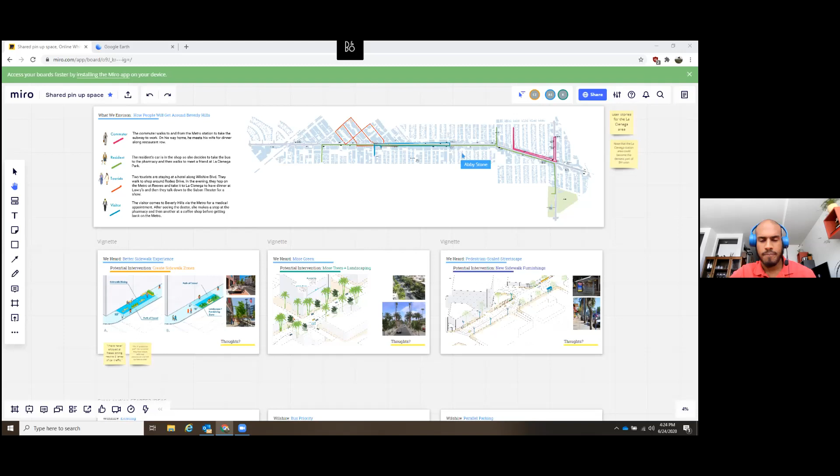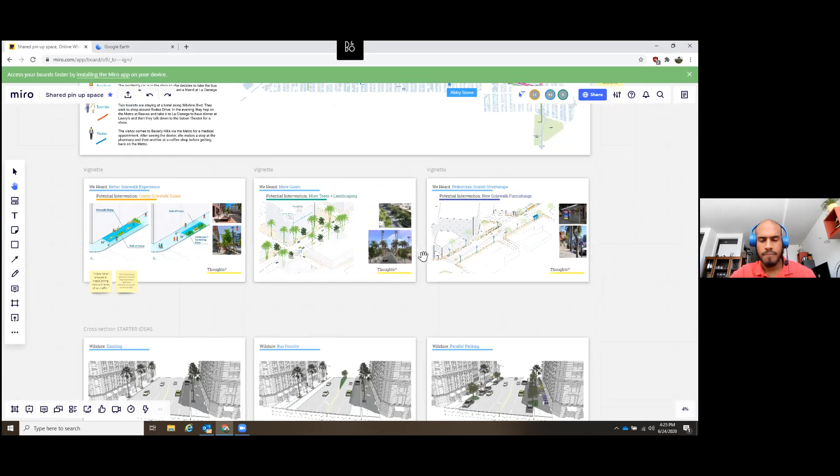So we're gonna dive into some cross sections or some initial ideas, which is sometimes where we get the most conversation about some initial view or concepts that we can think about for the corridor. These might change throughout the corridor, but for the most part, wanted to describe some different ways we can address Wilshire and La Cienega.

I'll dive into Wilshire first. As you're probably well familiar with the corridor, but this is what the overall right-of-way is. There are 3 travel lanes in each direction and a center protected left turn lane throughout the corridor. And then, of course, the 15-foot sidewalks, which is quite generous actually. In a lot of urban areas, you don't have that. So you do have good sidewalk space, but it's a matter of how we're breaking that down or treating it.

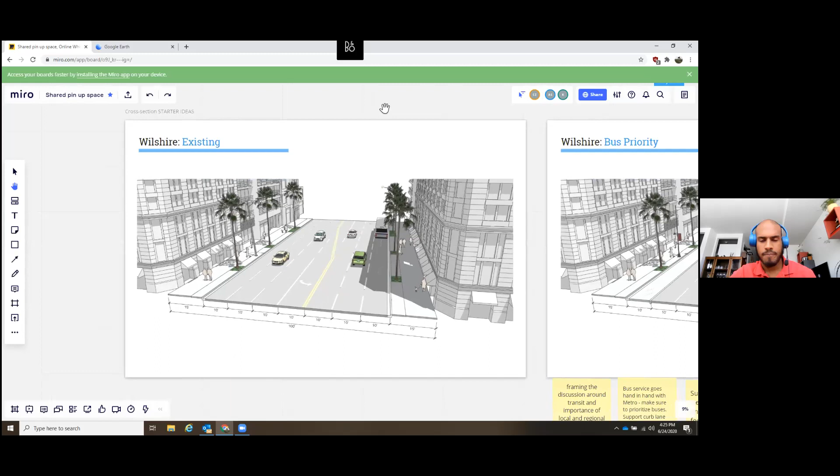And then there are some other ideas that we have around repurposing some of the lanes within the curb area. If we are looking at perhaps not taking a lane of travel, we could consider bus priority lanes throughout the corridor. This is one way that could look, where we take the outside lane and that becomes a bus priority lane. It can serve a dual function there as well in the future.

One of the nice things about this is as you think about that street edge and the pedestrian experience, when you have private motor vehicles going along that edge, they tend to go a little bit faster and louder adjacent to the pedestrian realm. If we put buses there, there's another sense of protection. It's a little slower in terms of how the buses operate, and feels more comfortable from a pedestrian perspective. Also, as we think about transit through this corridor, where the bus stations are located and how that zone right adjacent to the busway is treated will be really important.

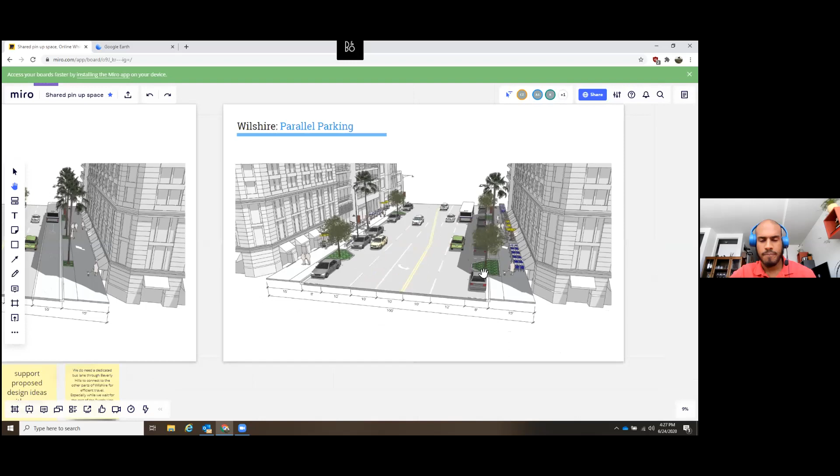All right, I'll keep going on to another option that may be considered as well, which is parallel parking. This is an opportunity to maybe increase the sidewalk in certain areas and increase the landscaping, and also provide space for parked vehicles. So one travel lane becomes repurposed to parking, and you can see what we call bump outs, where you have landscaping options, and that could happen at intersections to narrow the pedestrian crossing areas. The bump out would happen at intersections, and along the corridor as well, which narrows the feeling of it being a car corridor and increases pedestrian comfort along the edges.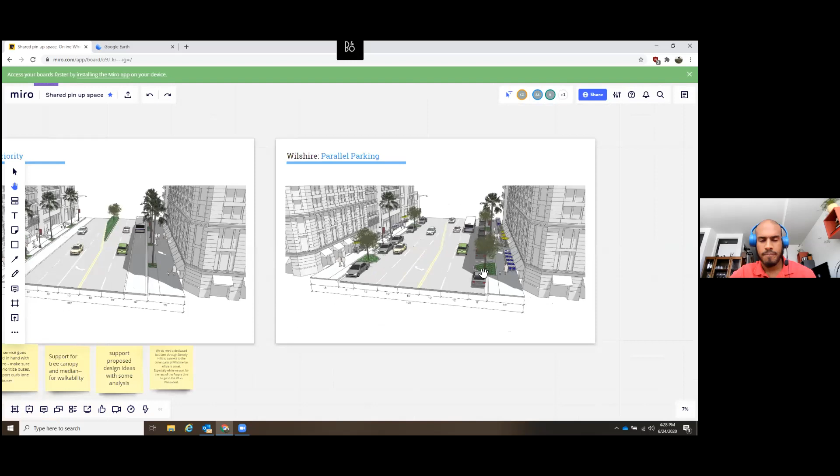One thing I wanted to mention, which we've talked to a number of folks through the stakeholder meetings about, is the idea of a median. That could happen in either of these configurations throughout the corridor. There's a generous space between curb face to curb face throughout the corridor, so this idea of a median could come into play, where we can still have the dedicated left turn lanes, but mid-block there may be options for a landscaped median that becomes kind of an identity feature for Beverly Hills. I know you do have that in some other areas, and we see them throughout other areas of Wilshire as well.

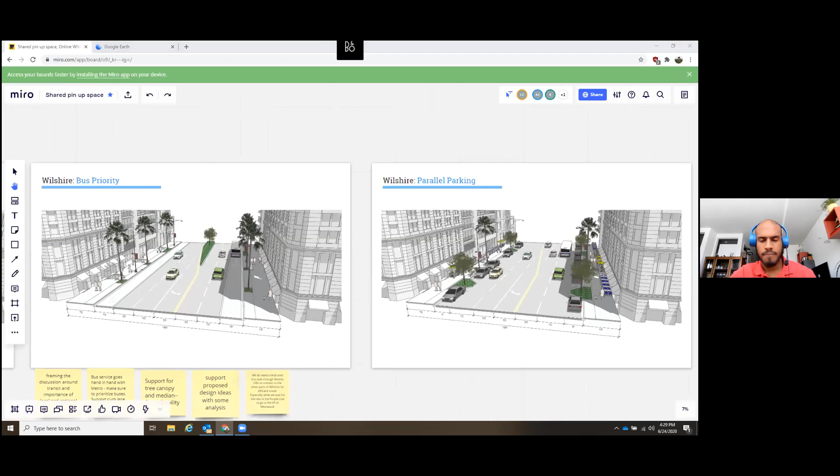Okay, I'll keep going on La Cienega, and we can pause at the end and zoom into any of the different cross sections as you like, or other elements we've talked about. La Cienega is not dissimilar to Wilshire in terms of its overall cross section — again 3 lanes in each direction, protected left turn, and generous 15-foot sidewalks on either side.

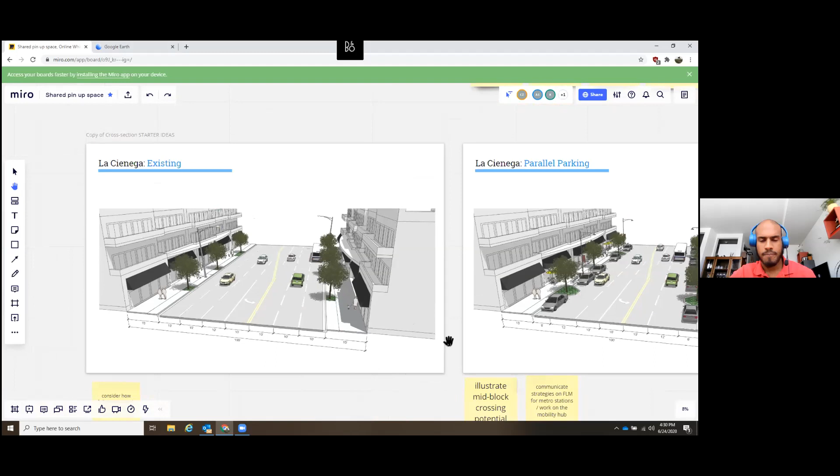One option here is that we could consider that idea of parallel parking throughout the corridor, providing parking along and adjacent to the building fronts, and allowing for landscaping in between in some areas, just to break up the rhythm of the parking. Sometimes landscape bump outs break down that parking so it doesn't feel like a sea of parking along the edge, and it optically narrows the corridor, having an effect on how fast people are driving through. It still allows for the vehicle throughput that seems like you need in this corridor.

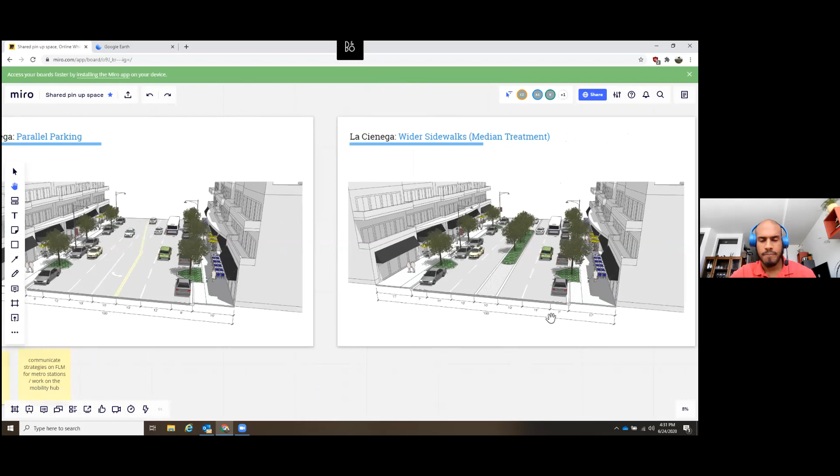Another option is to consider, in some areas, narrowing that parking a little more and adding a couple feet to the sidewalk, but in some instances we could fully remove it in some areas and really create a wide and generous sidewalk with much greater cafe spill-out space or retail spill-out space, if that seems like the appropriate intervention along La Cienega.

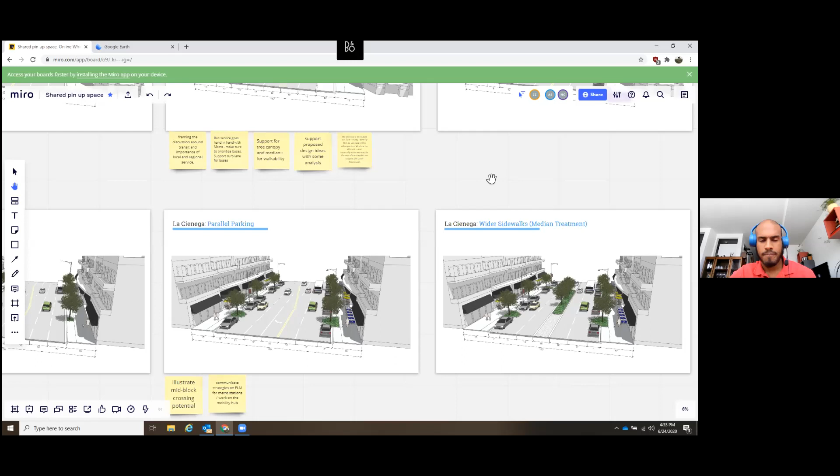We hope you can tune back in for future events. We have another closing presentation tomorrow afternoon, which will show what we presented today a little more refined, as we're in process right now. We'll have additional stakeholder and community engagement efforts throughout the summer, and another design charrette this fall, likely in September.

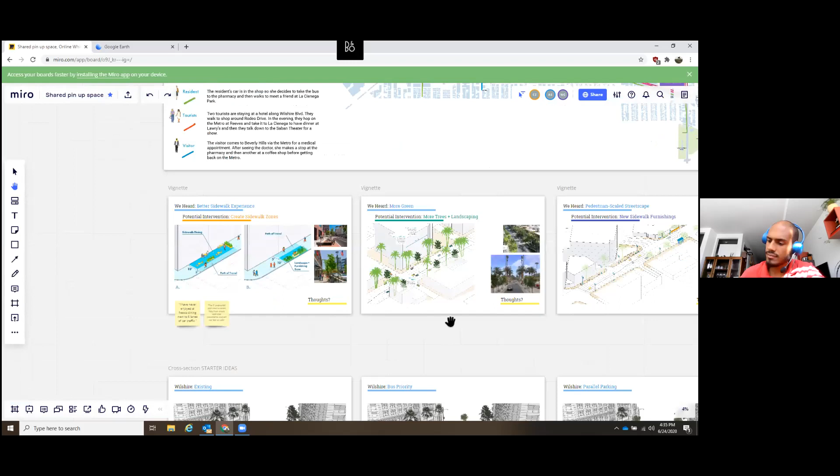I'm doing sound mitigation here. But you'll notice that some of the trees are planted in clusters. When they put them in, it's pretty clear they planted 2 or 3, going in as 8, 10, 12 footers. But when planted in clusters, they didn't account for the fact that they'd compete with each other. If you look closely, the trunks narrow a bit at the spot where they were about the height they were when they went in. Palm trees reestablishing tend to do that, they do this a little bit and then go up. The palms that do poorly and develop structural issues do that at the point where the canopies were trying to get away from each other.

So you have a hinge point. I wrote a paper about all this, if anyone's weird enough to care how palm trees move in the wind mechanically. You get these pivot points where the trees start drooping way over when they seed up. So if you're going to follow that model again and replicate it, make sure the palm canopies are wide enough that they don't have photosynthetic competition resulting in these pivot points and structural abnormalities. That's fascinating, Ken, I'm glad you bring that up, I'd love to read this paper.

Be the second one, that's great. Thank you. Yeah. But yeah, something to consider.

I think one of the things we'll want to think about is the short-term strategy, or a retrofit to what's existing, versus longer-term strategies for handling the placement so they're healthy and can establish. There's been about 60 trees displaced through the project, I talked about this a bit yesterday. There's a master plan in town for some of the palm streets, where the strategy was to take the streets most impacted by number of palms lost and put them in at one time to fill vacancies.